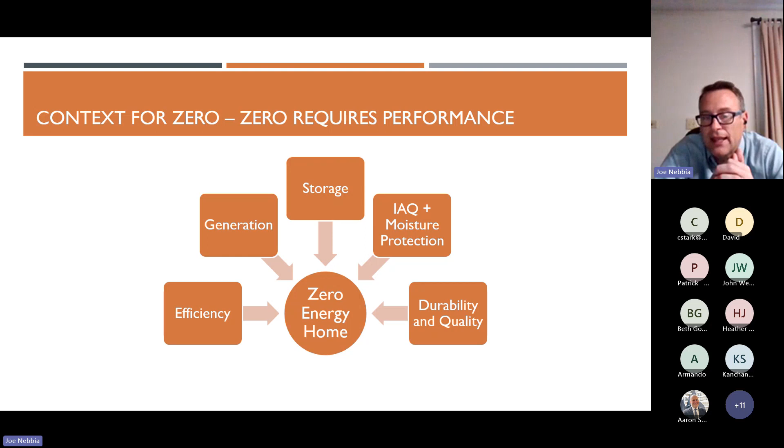So when I say a zero energy home, it includes all 5 of these components. And that's how I'll be addressing it in the class today.

So what makes up a zero energy home? What are the parts? First, we have to have an advanced envelope, and I'm going to go through these a little less detailed than I would in, say, a 2-hour class, but we have to have a fully insulated and air sealed envelope. We have to have advanced heating and cooling so that we're conditioning the space efficiently. We have to have advanced water heating so that we're delivering hot water in the most efficient and comfortable way possible. And then we have to have efficient components like lighting, appliances, controls, and those sorts of things.

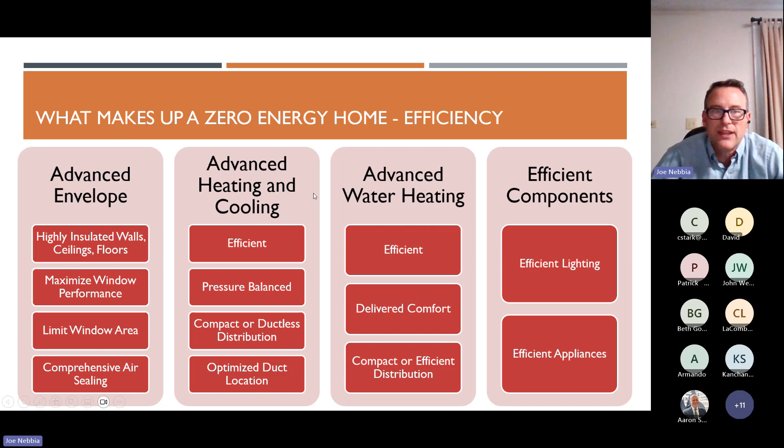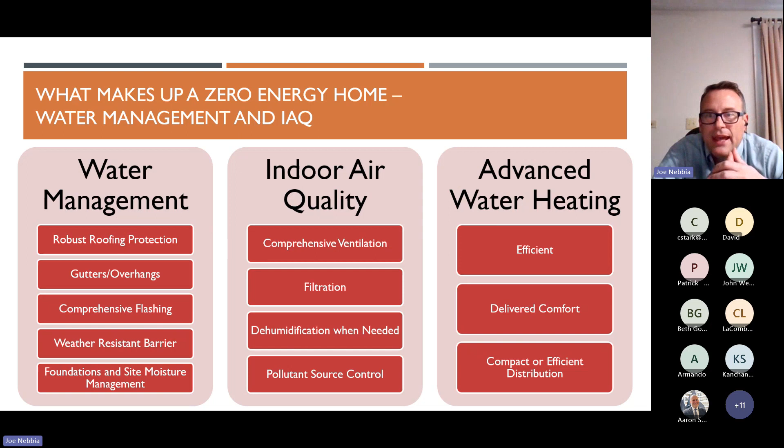For water management and indoor air quality, we have to manage both the bulk moisture and also make sure we're controlling vapor flow and things like that correctly. So we have to keep the water where it's supposed to be. We have to manage indoor air quality through comprehensive ventilation and filtration, possibly dehumidification and controlling pollutant sources. And then I've got an extra thing on water heating there, so we don't have to talk about that one.

For actually getting to zero, then we need to first start with the right sized home, right? So the bigger our house is going to be, we can still get it to zero. You know, there's a lot of discussion about, can a really big house be green? We can get that to zero, but it's going to take a lot more generation to get there. So we want to right size the home so that we know we can meet that zero energy target.

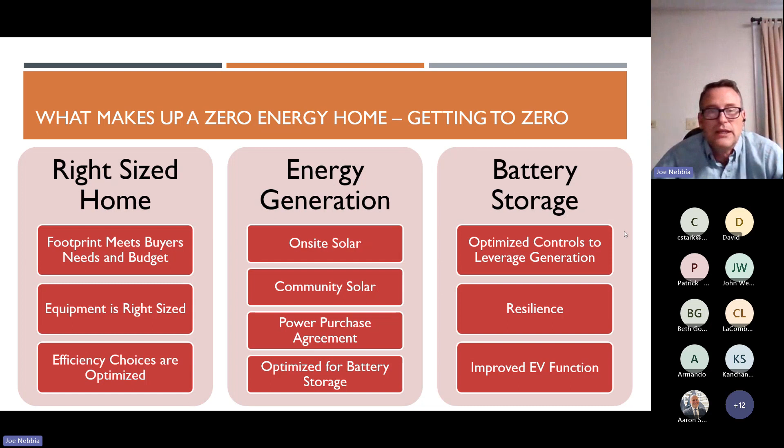We want to generate using a lot of the options I've already mentioned. And then we want battery storage, and that's going to give us not only ways to improve the efficiency of our generation system, but also grid resilience and possibly improved EV function. So those are the components I'm thinking of when I say zero energy home in detail.

Next, I'm going to talk about how do we define what's cost effective for zero. There are a lot of considerations for that. So first, cost is important, right? It's not the only thing, but it is a thing. And it's a lot of times when we talk about how to make zero energy cost effective, this is what we're thinking about, how to make the first cost effective.

I think many of us in this space also talk about things like operating costs and things like that. But I also want to talk, as we get into this, about concepts like first savings and cost versus value. There are things about first costs that change with the learning curve, and we need to consider that. How many of our first costs are one-time design costs that are going to change when we repeat the design? Then we talk about buyer operating costs. That's going to be important to the home buyer or the occupant. Builder operating costs, things like warranty issues and reduced callbacks, fewer days on market. These are things we have to consider in designing the zero.

These are some of the benefits. And then we need to think about other benefits outside of energy, things like savings from having healthy indoor air, health benefits, and the cost savings of having resilient, durable, quality design.

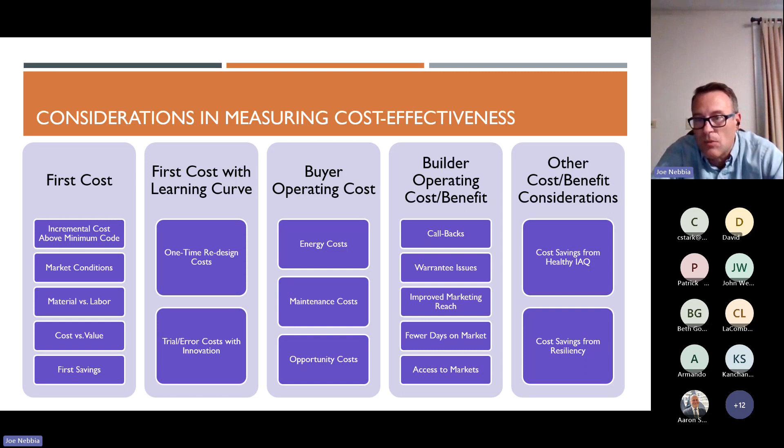So the first concept I want to address here is cost versus value. And I would say that we often in the building industry, we fail to give our customers a good experience with our product. And we only have one shot at it usually. We don't get a lot of repeat customers in the building industry. Depending on the builder model, maybe you do. But we fail to give that customer a good experience with our product. And a big part of that is we bring all of the cost, but none of the value. And so an example of that is insulation installation.

We can talk about how much getting to zero costs from an amount of insulation point of view. But in the picture here, in the top left of the screen, you'll see some significant compressed insulation. It's an R21 batt, a friction fit batt, installed in the cavity there, and you can see they didn't do a very good job installing it. They've actually put way too much insulation, didn't cut it to fit the height of that cavity, and they've just kind of stuffed it in there.

What I think this exemplifies is that it's not costing the builder less to do it this way. Not really - they're buying the same amount of insulation. So when you're designing a home and speccing out the envelope package, your buyer is paying for that amount of insulation. But in this case, they're getting maybe 50% of the value because it's not going to perform when it's compressed like that. Realizing that we need to deliver value when we're asking our home buyer to pay for something is an important part about making this cost effective, right? They're going to pay for something, they have to get the value out of it.

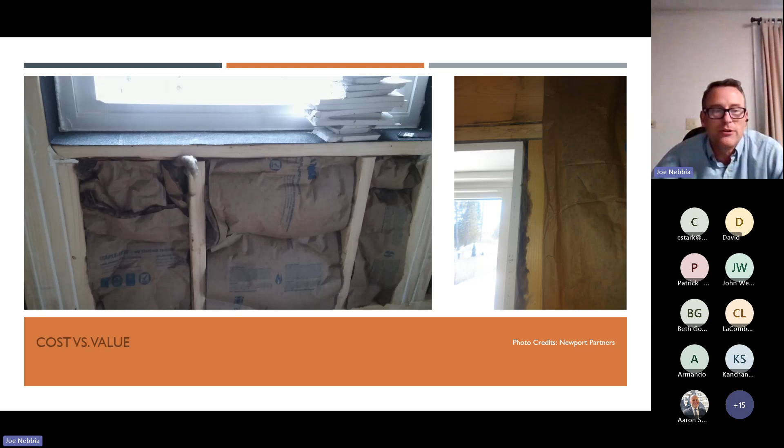Same thing, picture on the left here, we have a duct that we've got too much length of duct. I added a flex duct picture here because there was a time when we couldn't get flex duct - a year or so ago it was this rare commodity, and we would want to minimize our flex duct length as much as possible because the material was hard to get. Here we've got an extra 2 feet of bend there that didn't need to be there. It's actually providing a worse CFM in the install, and we've had to use more material.

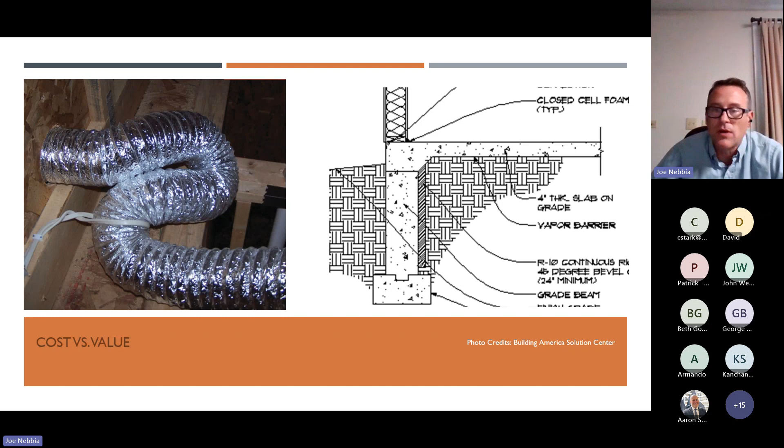And then finally on the right, you see a picture of slab edge insulation that's doing nothing, because it's not creating a thermal break at the slab edge. So somebody took the time to buy that material and install it, and it's providing the homeowner with no benefit. So again, if we're making the homeowner pay for something, we want to provide that value as it's coming in.

The next concept I want to discuss is products with multiple benefits. I think there's no one answer with any of this - you have to think about whether these products fit your type of building and your market, your supplier base, that sort of thing. But anytime I can, I'm looking for ways to get a product that's going to meet multiple goals for me. So again, this is conceptual.

This might not be the right product for you, but here's an example. Here's a ZIP product which has an insulating factor to it. It's also creating a thermal break as continuous insulation. It's structural in nature, so it's providing your structural sheathing, and with the tape, it's also providing your air barrier. So I'm getting one product, or one system really, that's providing my structural, my continuous insulation, and also my air barrier. I want to think about anytime I can pick a product that does multiple things for me like that.

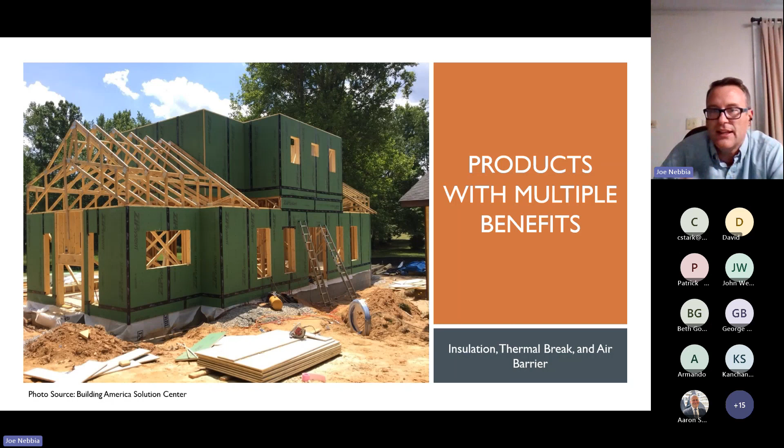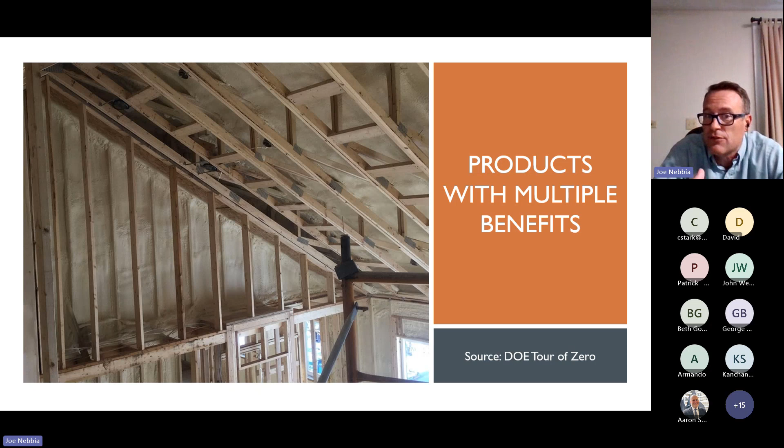Another example, this is a picture of closed cell spray foam, but spray foam again does multiple things. It insulates, it air seals, and in some applications it can provide structural benefit as well. So that's an example of a quality that other insulation products might not have. Not saying spray foam's the answer for everybody, but that's an example of a product with multiple benefits.

Here's an example of a balanced ventilation system with recovery. I'm not sure if it's an HRV or an ERV, I can't look that closely, but the point here isn't that this is necessarily the cheaper system. When designing things, we need to think about where we're pulling our exhaust air from and how we can offset some of that cost by doing multiple jobs. One common design is bath fan exhaust feeding into the HRV or ERV. You're pulling air from the bath because you need to do that anyway, so it becomes part of your HRV/ERV design. You're taking advantage of this more expensive system while eliminating other fans you might need. Think about those benefits where you can get them.

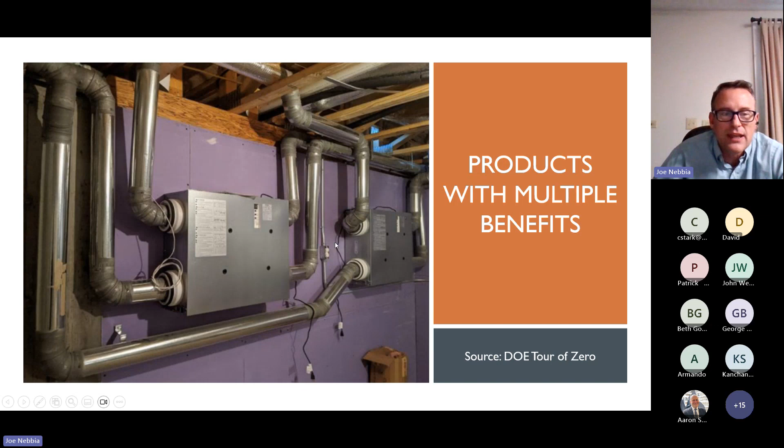Getting past the learning curve I mentioned early on - this is true about a lot of products where when we start to incorporate a change into how we're building something, there can be a big upfront cost. If we're moving ducts from the attic to conditioned space, there's a redesign cost, we've got to change our floor plan. If we're using heat pump water heaters for the first time, our utility closet might need to be redesigned from what we were using before. These are important costs to consider, but they're not ongoing costs - once we've got them designed into our systems, we don't pay that learning curve cost again.

One example is advanced framing. In that case, we're actually going to reduce the total framing cost going forward, but there is some learning curve cost for our trades, the carpenters, to understand how to implement that. So there's going to be upfront costs, but hopefully it's a saver over time.

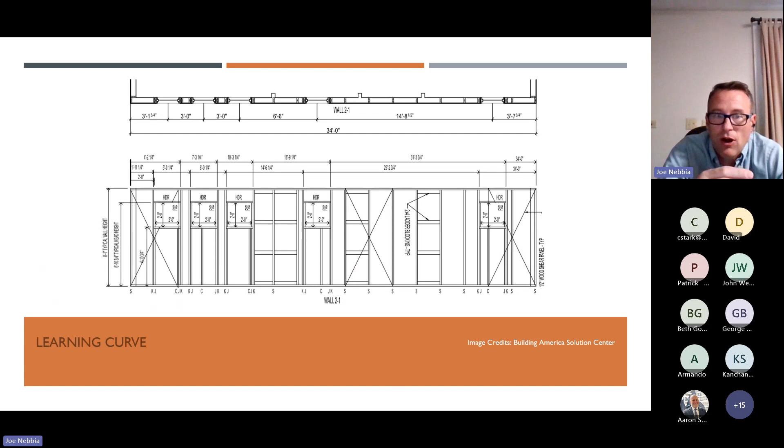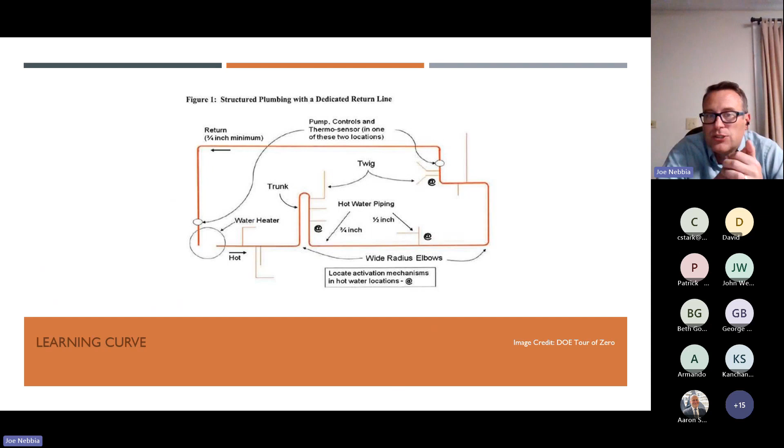Next we have an example of structured plumbing with a recirculation loop. If I'm trying to do recirculation for hot water comfort and water efficiency, there's going to be an initial plumbing redesign - this isn't how we would typically plumb a house if we're not using this recirc system. But once you've got past that learning curve, once your plumber has it standardized in their design for your homes, we can start to lower that cost of that technology a little bit.

Next, I'd like to talk about how we view costs in material versus installation. There's choices here - again, like the products with multiple benefits, there's no one approach that's going to work for you, but you have to think about whether you want to save money on materials or on installation. Those aren't always in conflict either, but different products are going to have different capabilities that you need to think about.

Here's an example of a double wall on the left. This builder, a good friend of mine, often said they knew how to build a 2x4 wall, so they just had their carpenters build two of them, and now they've got a double wall with a thermal break in between - a super insulated wall. They could have invested in a very innovative super insulating wall product. Instead, they built a very simple wall, built it twice, and filled it with blown-in insulation. So the actual construction is simple in that case, but the end result is very high performance.

So it's not always about picking the most innovative, advanced system. One thing I'll say is if you're in humid climates versus dry climates like this one, you need to be careful about your moisture design. On the right, it's hard to see in this picture, but it's a similar concept - a staggered stud wall. That's when they've got a 2x6 top and bottom plate with 2x4 studs staggered to the front and back of the bottom and top plate, so you've got a weaving continuous insulation situation, and they've added some additional zip system to the outside. But the point of this concept is you have to decide as a builder what's going to work best for you. It may be that a simple design done really well, or done with extra amounts of insulation, can perform as well as something more complex.

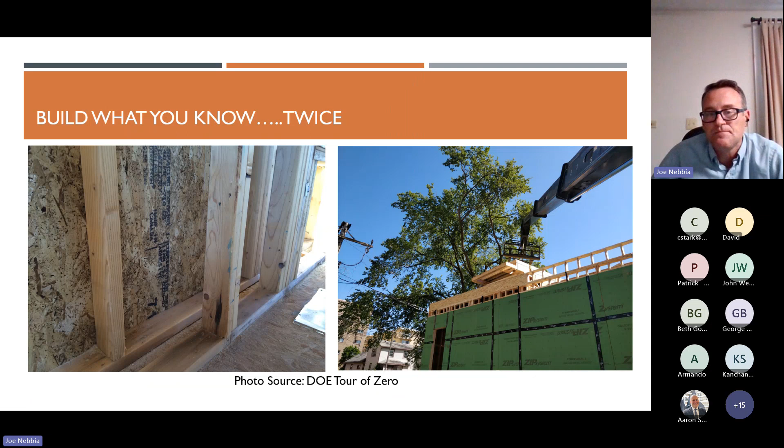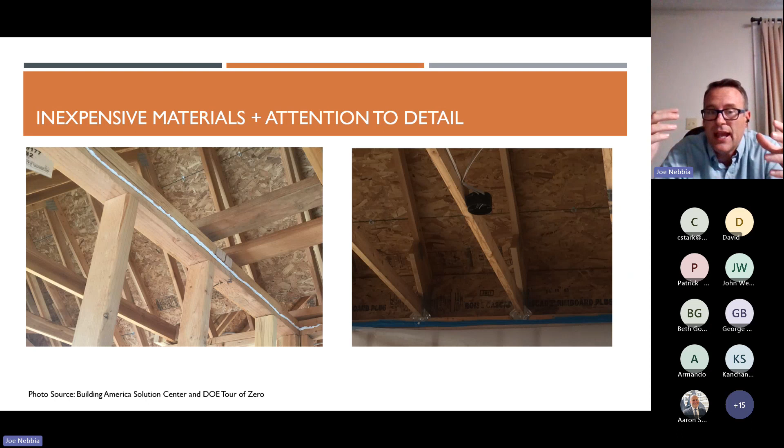Here's another example of that where we've got a builder using caulk and a liquid applied gasket. Very simple products, not expensive. They're low cost products that can be applied with attention to detail and achieve really good air sealing. In this case, they're buying cheap materials, but applying them in a way that focuses on high leakage areas and achieves really tight construction.

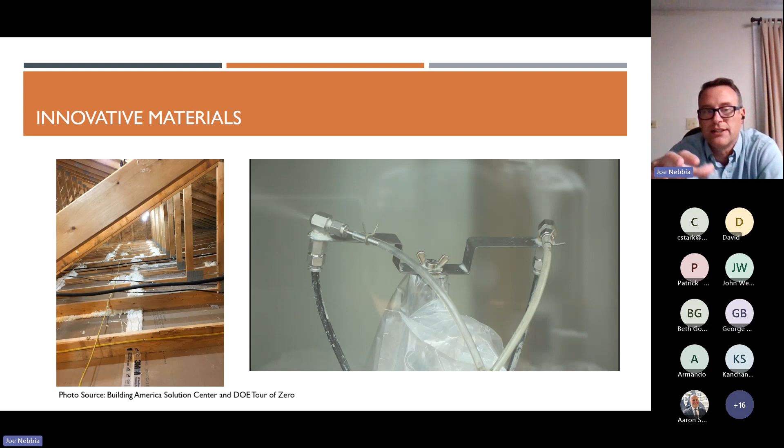An opposite approach might be to spray foam things instead of caulk. That's more expensive, but we might like the application better. Or, as shown here on the right, an aerosolized air sealant. That's a totally different process, really innovative, cutting edge, and it's all about the process. We invest more in the material and process, but maybe pay less attention to detail than with caulking exact joints, because this fills everything. There's also a repeatability of design that's important. If I can get the same blower door test result on every house because this product does that for me, there's cost effectiveness to that.

Now it's important to also consider what cost considerations matter to the buyer. When building or designing a zero energy home, we want to know about first costs - what can we afford to build and get value out of in the sale. But buyer costs are a completely different factor. First cost is still important because it means a higher home price and higher mortgage payments, but our operating costs may be lower, so we have a net monthly cash flow that's positive. First cost is only part of that equation for the buyer.

We know that with better quality, we'll have fewer repairs, lower maintenance costs, and fewer long-term durability issues. That's something many home buyers would be willing to invest in. I have a quote from Builder Online about common construction defects in just about everything we build: weather barriers, framing, mechanical systems, plumbing, fire-resistant assemblies, window and door installations. We have a high defect industry - not saying people on this call are necessarily in that camp, but that's an industry we work in. There are lower costs for our buyers if we can limit those defects. Again, one of the building blocks of a zero energy home is quality and durability, at least in my definition.

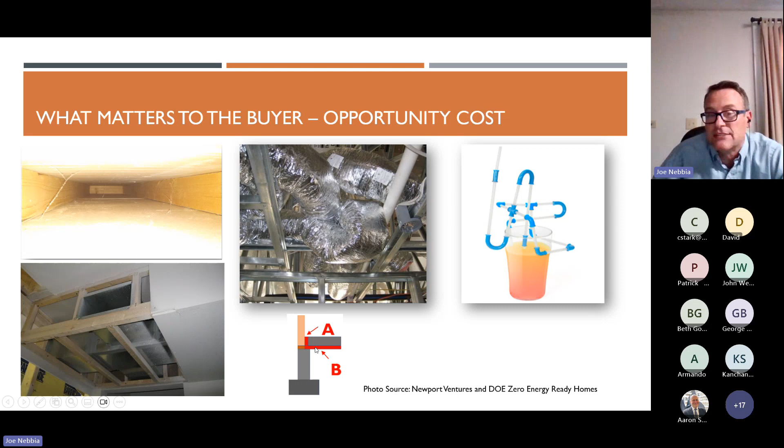And then I talked before about slab edge insulation. We're never replacing that slab edge insulation, at least in most installations. Getting that right the first time is absolutely crucial. Another concept I often think about with insulation is: is more insulation the best path? The answer is probably yes - we want more insulation, that's probably going to get us where we want.

However, there's a situation to consider that has a cost impact: the amount of windows we put in homes. This isn't my data, it's from the Journal of Light Construction, and it's a calculation.

It's pretty simple. If I have a U-value 0.30 window, that's code in climate zones 3 to 8 now for 2021 IECC, but I've got an R39 wall, a pretty big double wall. With just 15% window-to-wall area, my R39 wall is really an R15 wall from a whole assembly point of view. If I have an R60 wall, which is insane, it's only R17 with a 0.30 window.

And even if I get really low U-values on my windows, 0.15 is an insanely good triple pane window, at that R39 double wall I've still only achieved an R23 at 15% window-to-wall area. What's the message here?

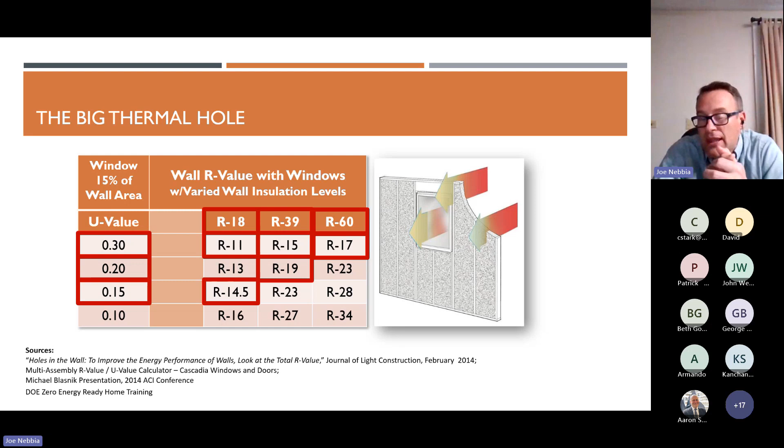Fewer windows. Nothing against windows, we need them, they're great, they let light in, we can open some to let air in—not mechanical ventilation, but it allows that—and they give us egress. There's purposes to windows, I'm not saying get rid of them, but we could do with fewer. They're more expensive than just a blank wall with insulation in it. We can get to zero much more cost effectively with fewer windows. Eliminate windows, we lower our envelope costs, and make that wall perform that much better in reality.

Now I'd like to talk a little about resilience, which might be disaster resilience. It could also be thermal resilience in keeping our heat in when the power's off, or grid resilience so we can keep powering things when the power goes out, or even just optimizing our generation system so that when the sun's down we're using the battery instead of the solar system, and we can make our zero energy performance even better.

So again, thermal resilience—if we can have a home that only drifts 1 or 2 degrees after a few days of no power in upstate New York or Minnesota or North Dakota, that's a pretty amazing thing. Power resilience—if the power goes out and I can still keep operating my house, that's pretty amazing.

And then finally, disaster resistance. If we're going to build a zero energy ready home, I don't want it to blow away, I don't want it to blow down, I don't want it to fall down during an earthquake. Wildfire—I'm not sure we've really come up with the best way to prevent homes from burning down in wildfires. We have some strategies, but if a wildfire hits your house, there's not a ton you can do.

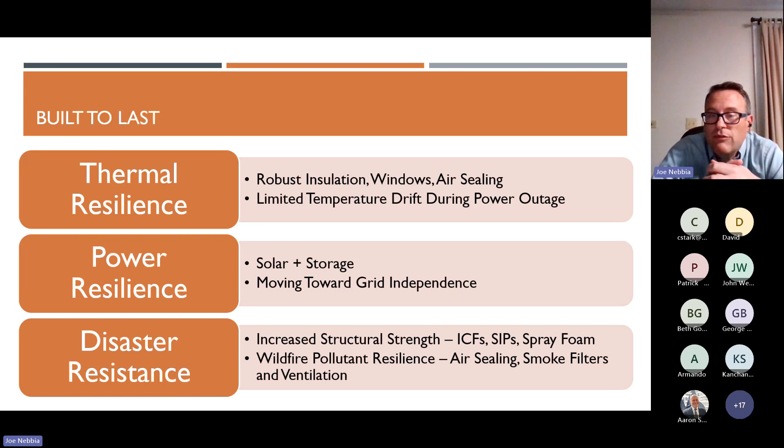For wildfire pollution resilience, if there's a wildfire in the area, we want high capture filtration and things like that so people can still breathe and stay in their home. That zero energy home is going to be that much better and cost effective if we don't have to replace or repair it significantly after a disaster. Think about how much smoke damage costs in a home. If we can keep that smoke out during a wildfire event through filtration and ventilation controls, we've saved that customer a whole lot of money.

Along the lines of resilience, accessibility, and adaptability—a home that we stay in will be more cost effective than one we sell and move from repeatedly. So if we can design adaptability, universal design into our homes, that zero energy home is going to be able to pay for itself because we'll be able to stay in it longer.

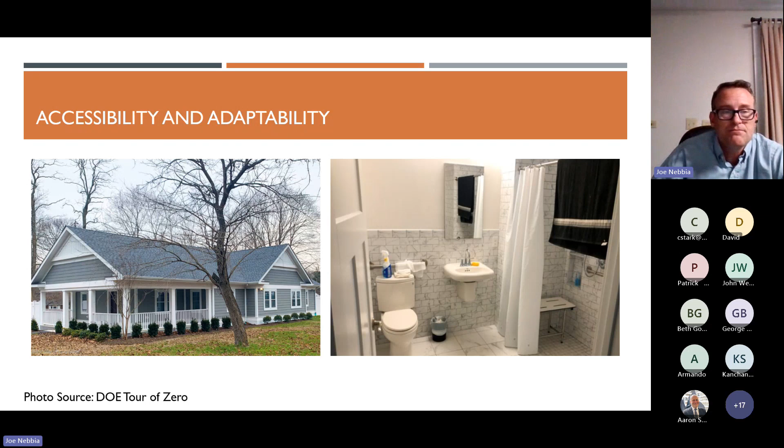Now that I've talked about those concepts, I want to talk about specific case studies where people are implementing a lot of these strategies around the country. Most of these case studies are from award-winning builders, on the Department of Energy's Tour of Zero, and you can look at them in more detail there, but I want to highlight some of them. We've got about 30 minutes left in the class.

Joe, why is there no driveway on that house? Yeah, I think it's over on the left there. Not all homes have a driveway. There's a garage door right in front. That's funny, I've never noticed that about that picture. Just a reminder, put your questions in the Q&A, we'll keep asking Joe. I see something came up in the chat—I think it's just a thumbs up for the case studies.

I'd love to see an off-road EV that would work well with this garage. I guess you would need it in that case. I think the plants in front of the garage are a nice touch too. Absolutely. All right, no questions thus far.

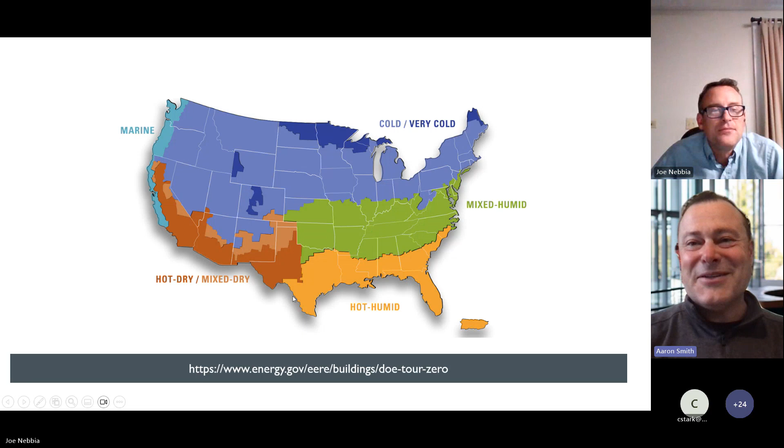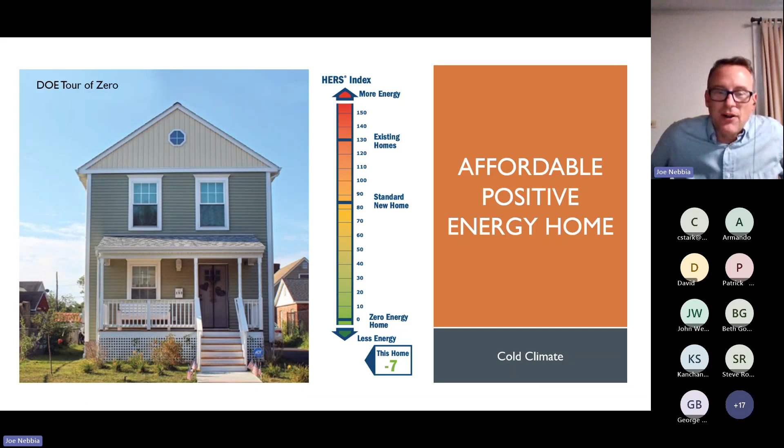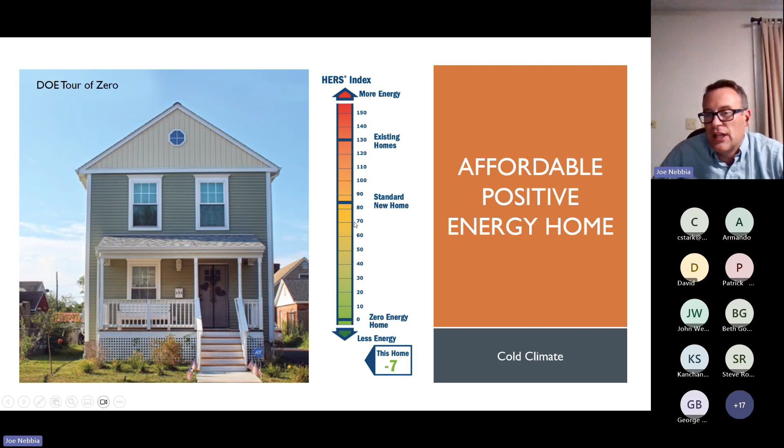Thanks. Okay, so the first home I want to talk about is a Habitat home in Connecticut. Obviously, part of Habitat's mission is making things affordable. I'm not saying everything about cost-effective design has to be about a specific affordable housing program. Cost-effective can be in different ranges for different buyers. But this is an example of an affordable home that reached HERS -7, which is pretty impressive.

They used open cell spray foam in the cavity as well as continuous sheathing and advanced framing to get to an R31, R60 attic with blown-in insulation, R21 basement with a precast basement system, triple pane windows, and a very tight 1.12 ACH50 using their spray foaming and zip wall as their air sealing strategy. For mechanicals, they used ductless mini splits and transfer fans to move that heated and cooled air throughout the house. They had a heat pump water heater as well as an energy recovery ventilator.

LED lighting isn't really innovative at this point, right? Everybody should have it, but it's certainly cost-effective from an operational standpoint. For generation, they had 7.7 kilowatts of solar, again to get to that -7. For quality, they had planning meetings with all of their subs to make sure everyone was on the same page with what they were trying to do. Comprehensive water management for durability so that the walls wouldn't get wet and deteriorate. In addition to that balanced ventilation system, they also added advanced filtration and controlled their sources of pollutants in the house. So pretty good package for what ended up being an affordable home.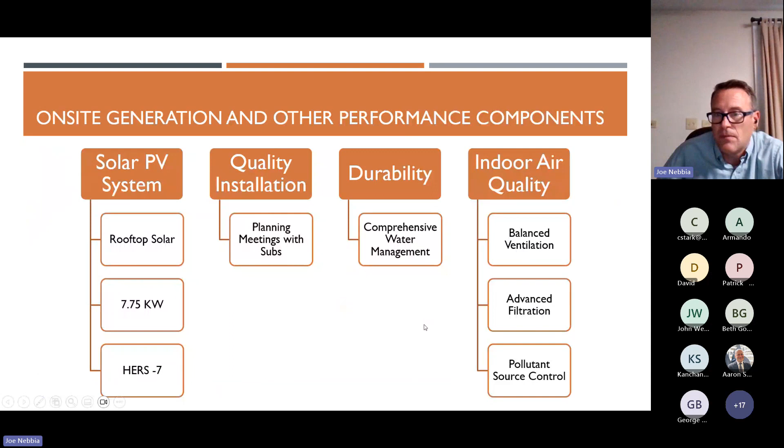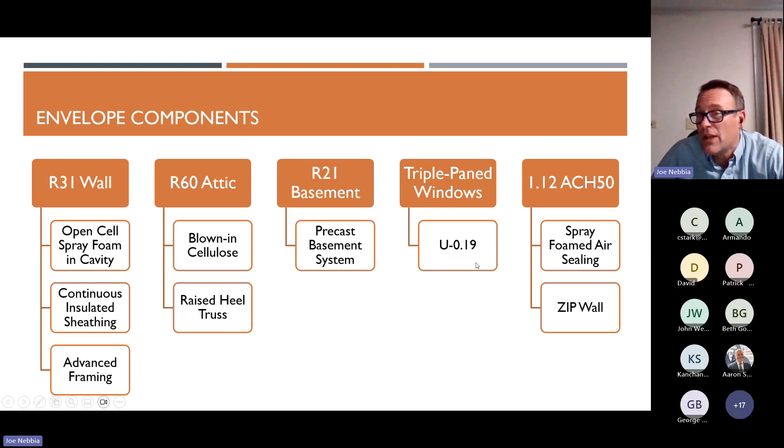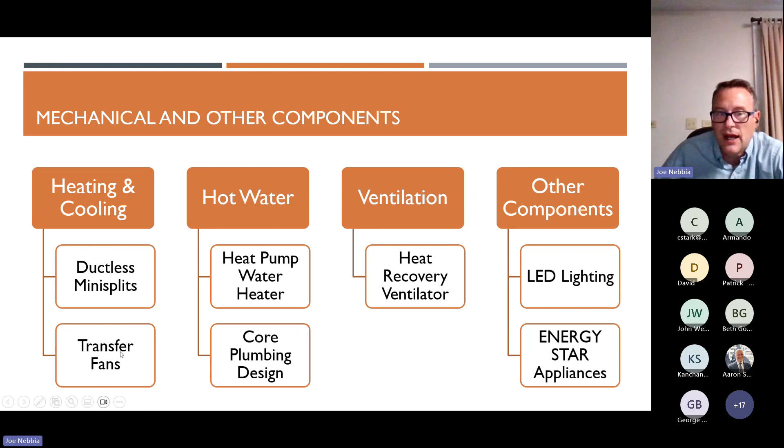If you look at this, there's nothing particularly incredible here, right? Open cell spray foam widely available with zip sheathing on the outside, blown-in cellulose in the attic. Nothing fancy there. Triple pane windows is probably one of their big investments. Ductless mini splits is more on the innovative side, but they've made it cost effective by having fewer heads and using transfer fans to circulate the air.

The next example I want to show you is this above-garage ADU. This is out in Washington, I believe, where they've got a detached garage on the property, and so they built this ADU to help the homeowners with rental income. They were also able to use the ADU's roof area for solar that helps power both the accessory dwelling unit and the house itself. So good use of space in this situation.

Again, nothing fancy on the walls, blown-in fiberglass as well as continuous insulation to get to a total of an R31 wall. They are using an unvented attic with above deck insulation. That's not really common in residential construction, so that's a little bit out there, as well as blown-in at the ridge line of the roof. Floor insulation, because it's an ADU over a garage, they had to insulate that floor. They have R48 blown in.

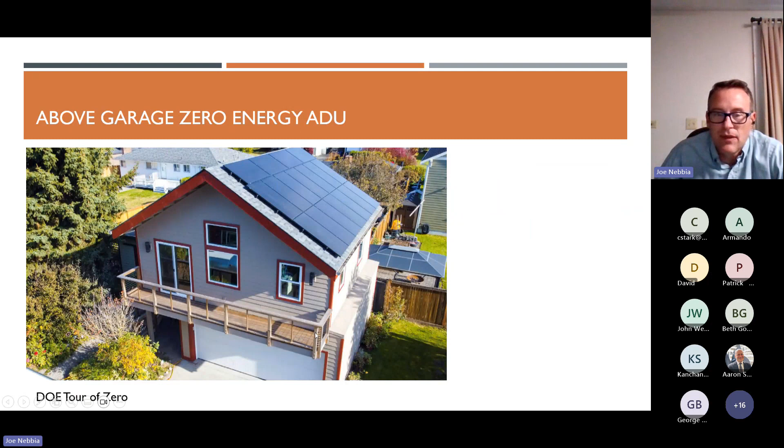Again, it's a lot of insulation, but it's not a particularly innovative type of insulation. So you can see how some of these builders are trading off amount of insulation for maybe some of the cheaper kinds of insulation. Triple pane windows, again, that's a big investment here. And then AeroBarrier got this down to a 0.94 ACH50. That's really impressive given the fact that this is above the garage, so there's an external floor here, which has to have extra attention to detail. It's also a small volume, which is harder to hit that 0.94 ACH50 on.

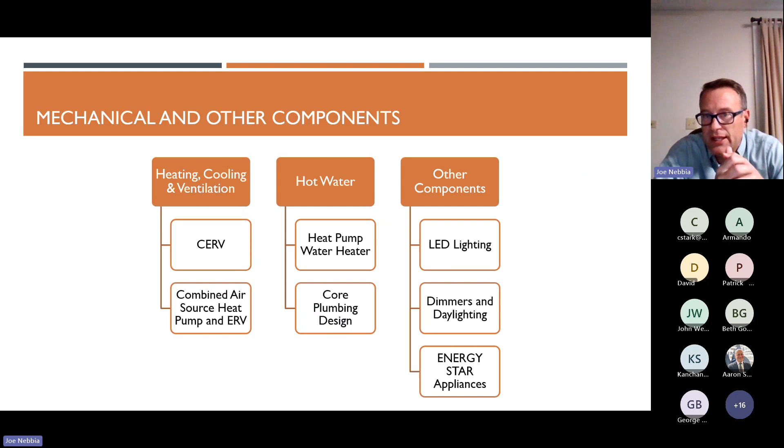For conditioning, one of the ways they saved money was they combined their ventilation system with their heating and cooling. So they used a conditioning ERV, kind of a niche product, but for a small space like this it works really well—one of those products that does multiple things: heating, cooling, and ventilation. Heat pump water heater, and they also used lighting controls along with their LED lighting. The rooftop solar was 5.85 kilowatts, probably more than just the ADU alone needed. The ADU was actually a HERS negative 20, but again they were able to use some of that excess production to help power the main house.

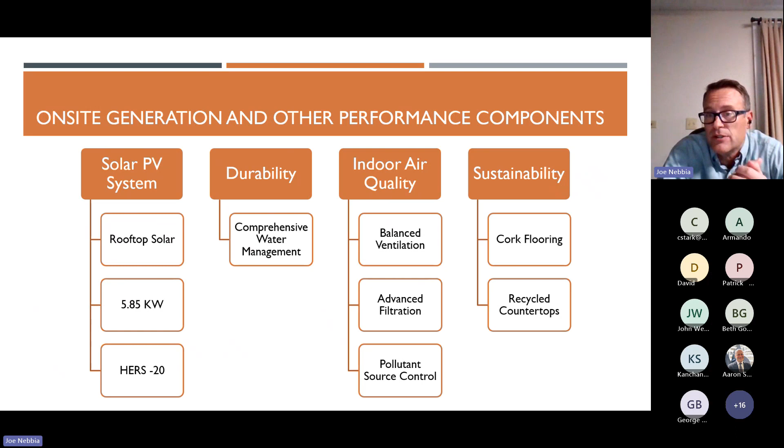Comprehensive water management for durability, indoor air quality with that CERV, as well as advanced filtration and pollutant source control. They had an interesting thing with cork flooring and recycled countertops, because one of their goals was that a zero energy home has to have sustainable materials. So for this builder, part of defining cost effective was including sustainable materials, and that was something where they had to think about their product selection.

The next project I want to talk about was really an impressive project in my mind. It's a mixed-use multifamily building where the first floor is retail, and then I think it's maybe 39 or 40 units. It might be 60, I'm forgetting the exact number of apartments.

It's net zero performance on a whole building basis. You can see all of the solar there on the roof, but there's some really incredible things about this design. One is that, first of all, it's ICF construction for multifamily, which I think is a great application. It also has a ground source heat pump system that serves for both the heating, cooling, and also the hot water.

What's amazing about this is that when the designer was asking the ground source heat pump contractor for a quote, the contractor said, 'Do you want hot water with it or not? It doesn't cost any more.' And that's really incredible, that they can get their heating, cooling, and hot water for the same price as their heating and cooling.

The reason for that is, for the ground source heat pump, you want to be grabbing waste heat in cooling mode whenever you can. This apartment building, despite being in upstate New York, is actually cooling dominated because it's so super insulated. There's hardly any heating load. Most of the load in the units is actually from internal gains.

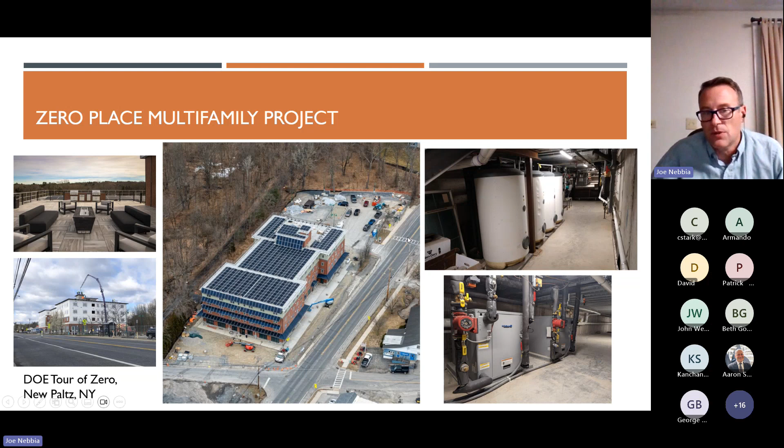ICF walls is pretty innovative. This builder has argued to me that when you want to get to zero energy, cost effectiveness around ICF starts to look a lot better, because it's harder to get super insulated and lower HERS scores with traditional products. It allows them to do it with, or you need much more attention to detail with traditional products than they're able to use with the ICF, which is very easy to install and to air seal.

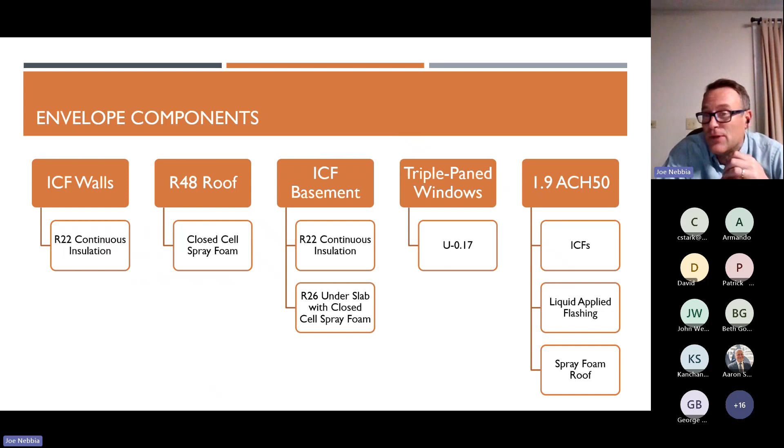For the roof, they use closed cell spray foam, ICF basement, as well as under slab insulation, and then triple pane windows. Of course, that's another advanced product, but they're finding a way to make it work in a multifamily building. 1.9 ACH50 for this builder, that's actually pretty high. Their single family homes are down closer to almost no leakage in real measured amounts, but multifamily is a little harder to seal. Again, that ground source heat pump is what I think is really innovative about this project.

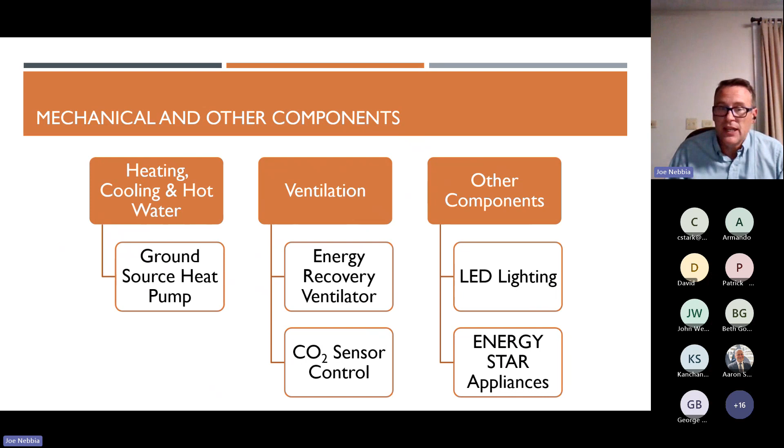They're also using energy recovery ventilators for all of their in-dwelling unit ventilation, and CO2 sensor controls for boost ventilation. The solar, they had 248 kilowatts of solar, and got to a negative 14. I guess that must be a per unit number for the HERS index itself.

For quality installation, they had an integrated design process where they worked hand in hand with their energy consultant, met with subs, and I've heard the project managers on this say they really had to bring the GC along to understand this different kind of construction and have a lot of input in that kind of quality installation process. Durability, they have high wind resistance in this project, and then they have advanced filtration and pollutant source control in addition to that sensor-controlled balanced ventilation.

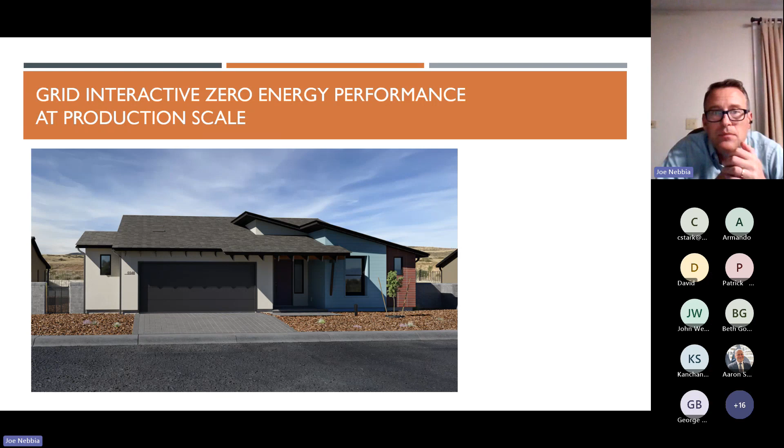This is an interesting project I want to highlight real quickly. It's in Arizona, and it's grid interactive zero energy performance at a production scale. What I think is interesting about this, again, there's not anything super out there as far as how they're building.

Open cell spray foam, very common in the Southwest, along with some rigid foam insulation on the outside, open cell spray foam in the attic, and they're using double pane windows, but they're getting to a 0.66 ACH50 on a production scale, which is pretty amazing. Again, using this aerosolized air sealing product, this particular builder learned how to do it themselves, and so that's how they made it cost effective.

So they had their staff trained to install the Aerobarrier system, and they do it on all their homes. That's how they can save a little bit of money.

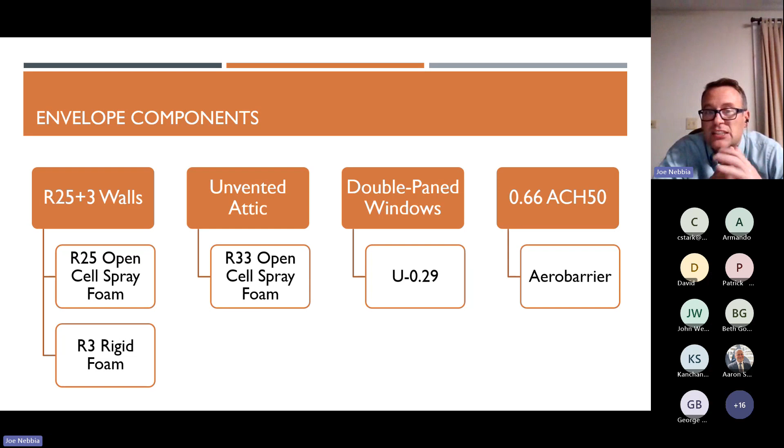But I can't stress enough, at a production level, the predictability of air sealing results has a cost factor to it. If I can say that every time I'm going to meet my air sealing target, I'm not going to have to go back out on site. Every time costs money to re-air seal things, find the leak, do infrared testing to find where my leakage problem is on something that fails. This is really key to a builder doing volume, especially if it fits their building type.

Mechanicals, again, nothing super fancy here. They've got a central air source heat pump, an efficient one, but it's just a standard split system heat pump. Energy recovery ventilator with IAQ sensor controls. We're seeing a lot more of this now. Builders are thinking about ways that they can optimize their ventilation system size by controlling it based on actual pollutant load in the space. And then LED lighting and lighting controls.

So Joe, that IAQ sensor would just be like a humidity sensor, a CO2 sensor, some of those things. In this case, it's a CO2 sensor. Other people are using PM sensors. The main thing we're actually concerned about in indoor environments, as far as long-term effects on human health, is particulate matter generated in cooking, and then NO2 generated in cooking. Those are kind of the acute things, and formaldehyde's a little bit expensive to do sensor work on. CO2 is kind of a proxy, right? We know that people are breathing in the space, and so we want to ventilate it at those times as opposed to times when nobody's there. But yes, you could do humidity sensors as well. There's a lot of different ways. This particular one, I think, was CO2.

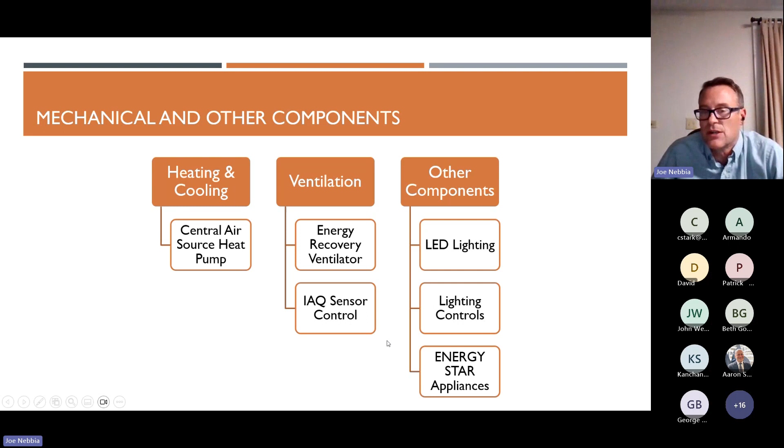Great, thank you. The other really interesting thing about this project, and this builder in general, is that they've done a lot of work optimizing their solar system combined with battery storage. So you see they've only got 3.74 kilowatts, and they're reaching a HERS 14, and they would say they're actually reaching zero energy performance, and it's not quite captured in the HERS rating system yet.

But how they're doing that is they've done studies, and they're using controls to optimize when the solar is being used and when the battery is being used. And they're analyzing local time of use rates, which they have for residential construction, and actually advising their customers on which utility plans to use based on their algorithm for optimization use. So they're able to get to actual zero energy performance regardless of the HERS index, with a smaller solar system by optimizing that battery system and the controls around it.

So Joe, they're in a market where there's a peak off-peak rate that they're really trying to plug into and optimize. That's right. And so in an area where you don't have that, in an area where you don't have residential time of use rates, or you don't have net metering, this is a little bit more complicated. But if this fits your situation, they're able to buy a much smaller solar system and pair it with the battery than they would have to. I think they said this would need to be like a 7 kW system if they wanted to get to actual zero performance. Otherwise, and you still wouldn't get quite to zero performance because of the peak and non-peak aspects of it.

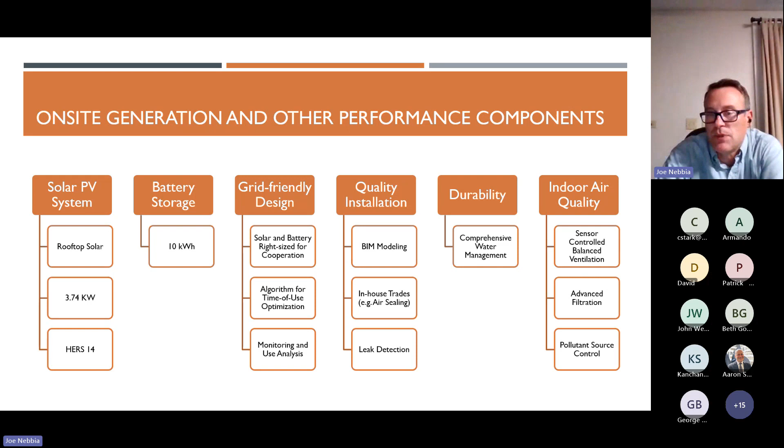This example I just want to highlight briefly, since we have about 13 minutes left, because it's a SIPS home. One thing I want to stress about this product is that it's one of those products that does multiple things. This product is my whole wall - it's everything structural, my insulation, my sheathing, my air sealing, all in one package. I love products that do multiple things.

The other thing about this is the flexibility. With a SIP panel, I can put a window anywhere because of the way the system works. If I need to change my design midstream, I've got some flexibility to do that - not unlimited, but there's some amount of flexibility as I'm installing these panels to change egress points or things like that. So I like that about SIPs.

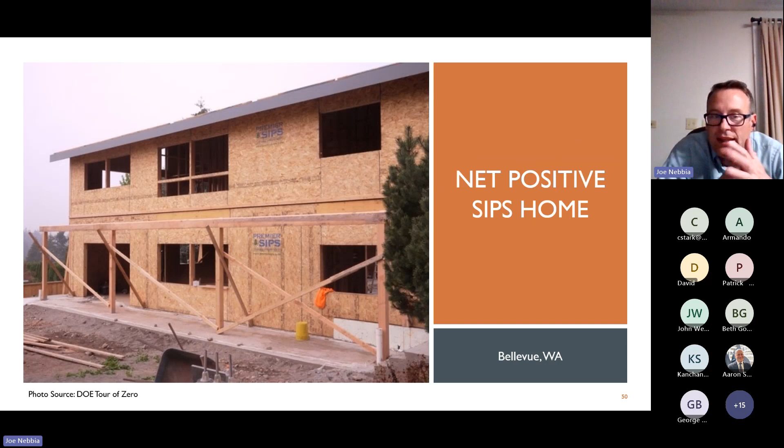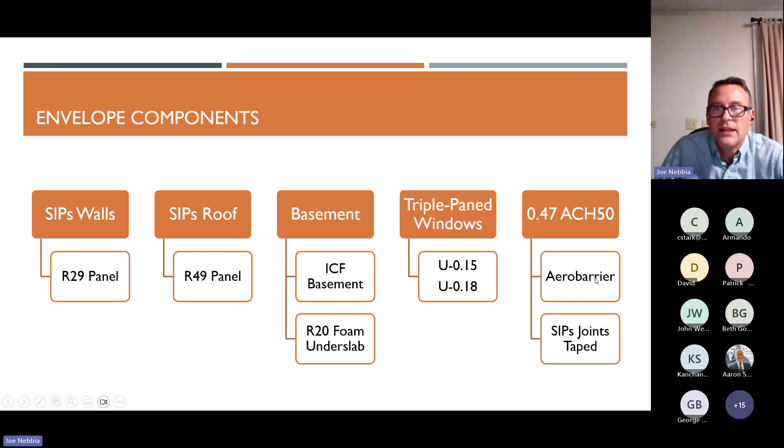This particular house used an R29 panel and an R49 panel on the roof, with an ICF basement - I don't actually see a basement in there, so I'm not sure if that's a misprint, but maybe part of it is. They used a 0.15 or 0.18 triple pane window, pretty advanced, and added Aerobarrier in addition to the SIPs. Look how tight they're getting - 0.47 ACH 50. I'm not sure they needed both SIPs with taped joints and Aerobarrier, but they wanted super tight performance and they got there.

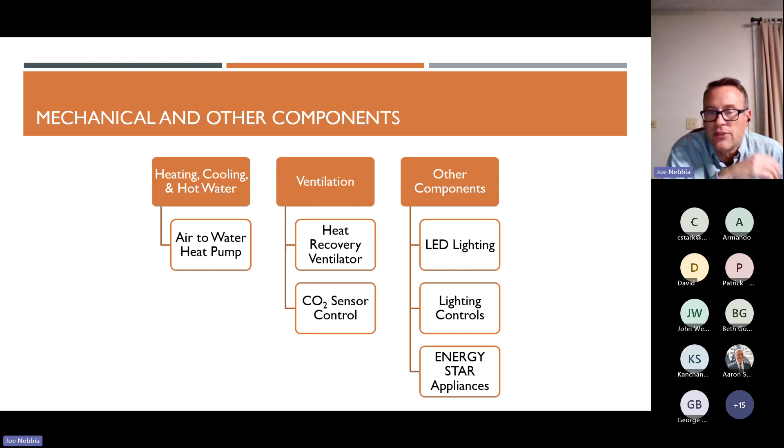An air-to-water heat pump, again one of these products doing multiple things because it handles heating, cooling, and water heating. Unlike the ground source system we showed before, this is an air source heat pump used to heat, cool, and water heat the space. Finally, a heat recovery ventilator with CO2 sensor controls, and this builder is also trying out particulate matter sensors.

Rooftop solar - they're using 12.87 kW and overproducing by 22%, using that to charge their electric vehicles. One way to do electric vehicles cost effectively is to have solar, and it helps to have a battery too. This one is only battery ready, but Joe, I think that's important.

Joe, have you seen any of the Tour of Zero or Housing Innovation Award applications doing vehicle to grid or integrated charging yet, or is that coming online? I've seen people talk about it.

I'm not an expert on this, so if somebody's from a vehicle-to-grid company that makes a product, I'm not trying to say anything specific about your product, but the reviews I've heard so far are that there's some software work still to be done - from people who have bought bi-directional chargers. I think that's incredible potential, and I'm sure some people have found ways to work it, but I've also heard a lot of hiccups. It's one of those things just getting out into the marketplace, and I'm sure it'll continue to improve.

It'll be interesting to see, because the application period for next year's awards is coming up, and if that's a big shift we see in new technology coming online... Yeah, I'm always interested in seeing those. I'm not seeing a ton of them yet, at least in the Housing Innovation Awards and Tour of Zero, but I am seeing some builders talk about the concept - just not quite putting it in yet.

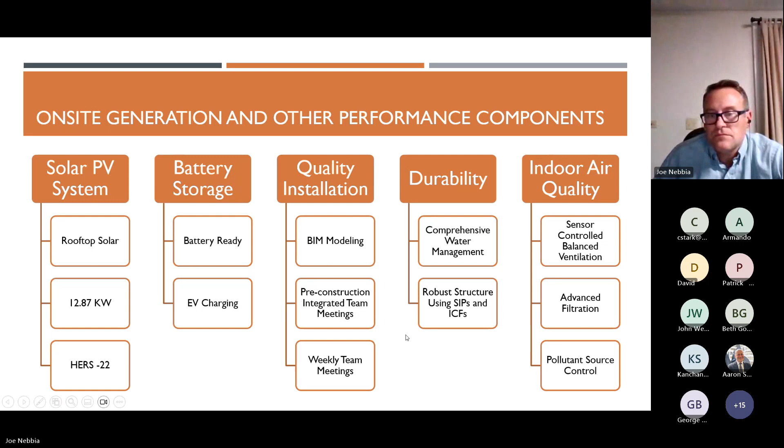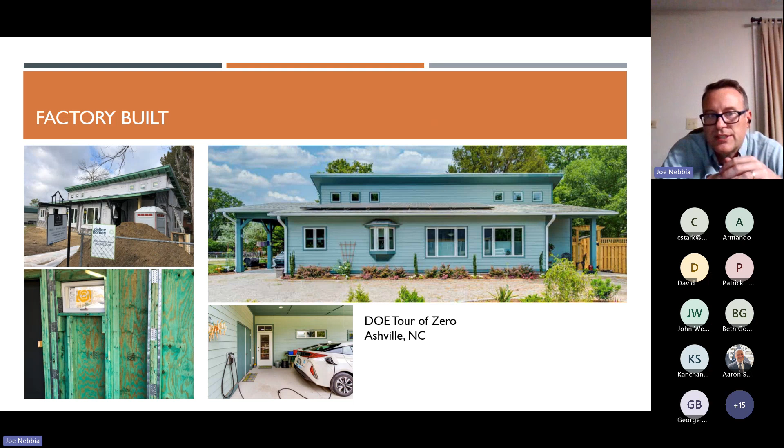I have about 9 minutes left, so I'll talk about a couple final projects here. This one is in Asheville, North Carolina - I don't think they describe themselves as modular, it's factory built. They're a panelizer, but they have kind of set designs for their houses, achieving cost effectiveness through this factory environment.

Nothing earth shattering as far as the wall goes - blown in cellulose and rigid insulation, along with open cell spray foam at the roof deck. Slab edge insulation, that's pretty typical. Double pane windows, and for air sealing they're using strategic use of spray foam as well as gaskets. Nothing real earth shattering there either.

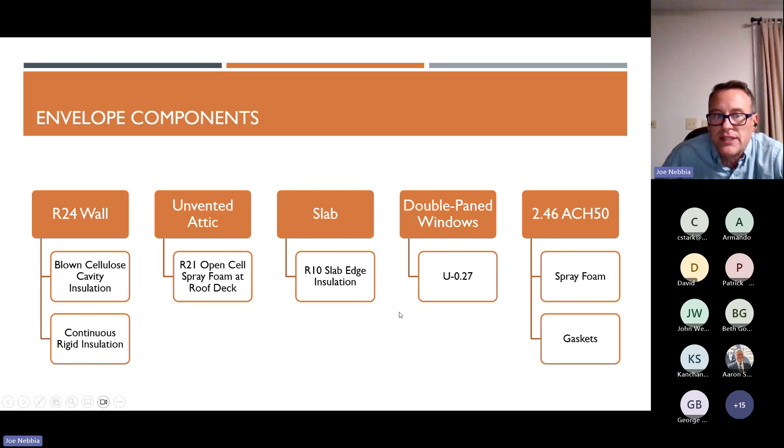But they're getting to that zero energy performance through careful attention to detail. A ducted heat pump, again kind of a central split system, along with maximizing passive solar design, a heat pump water heater, and a supply-side ventilating dehumidifier, which they found worked better in their climate than a balanced system. There are some builders who feel that way in the Southeast.

And then for solar, they've got 7.2 kilowatts on the roof, negative 21 ERI. Again, this is an example I think of a right-sized home. They've sized the home so that they can overproduce and have the potential to charge an EV system.

So they focused on getting the system pretty efficient, efficient mechanicals, oversizing that solar a little bit, and hopefully that'll be a long-term cost effectiveness for the home buyer. The factory controlled environment adds some cost savings for this builder, and they have very high termite, hurricane, and wind resistance built into all of their structures. So this builder focuses on delivering long-term durability so the buyer can realize those cost investments they make up front.

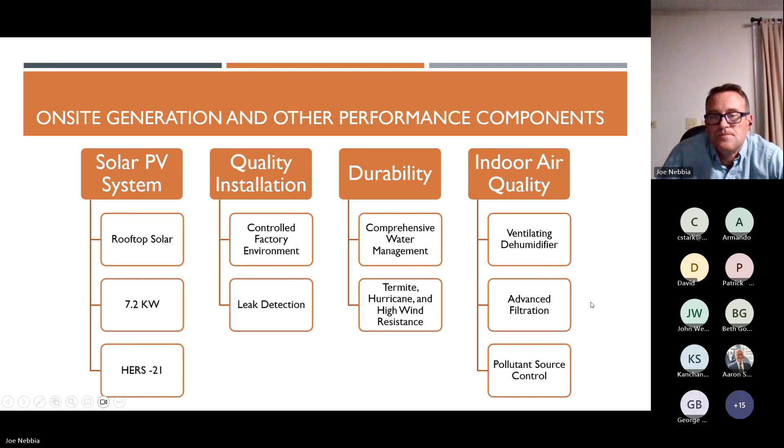Now I'll show this home from a builder in Virginia who likes to use the term simplicity of the build. One of their big focuses is not doing things too complicated, trying to keep things as simple as possible, because they know they can replicate it and achieve it with a high amount of quality.

So the type of systems they're using: flash and batt cavity insulation with continuous rigid insulation. Again, nothing too out there as far as their walls, blown-in cellulose in the attic. This builder, by the way, is upgrading as they move to the Zero Energy Ready Home version 2, all of these insulation things to meet the new specification.

But at the time this home was built, this was what they needed to do. Rigid foam insulation in the basement or crawl space, depending on what they're using in that development, and a double pane window, pretty standard stuff that anybody can get on the market. They're getting to a 1.4 ACH 50 essentially through attention to detail.

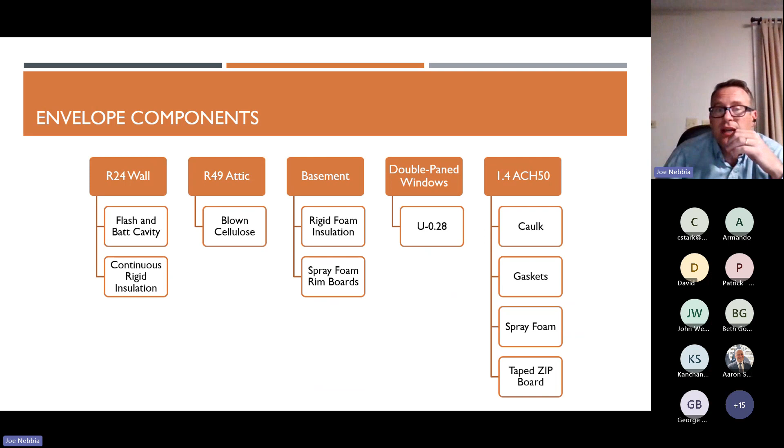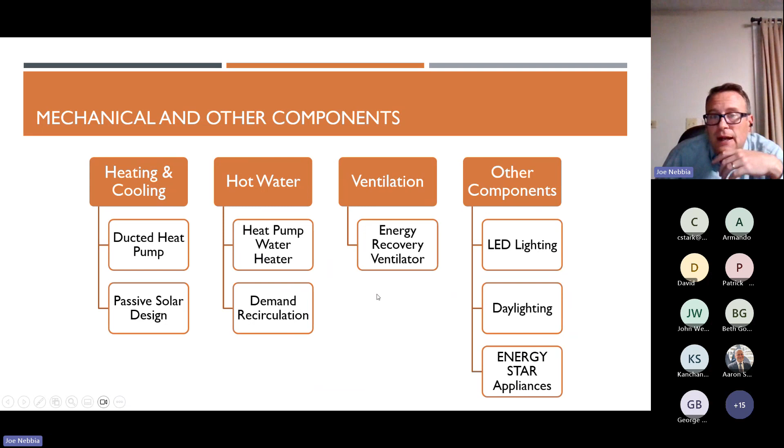Their products help them some, open cell in the wall helps them some, tape on the zip board helps them some, but mostly it's attention to detail, and I think that's an important aspect of this design. A ducted heat pump, again just a regular split system heat pump, along with a heat pump water heater, energy recovery ventilator, and LED lighting.

They've got 6.2 kilowatts on the roof and are getting to a HERS 4 on this particular home. They have EV charging and battery options, so the homeowners can get that.

But one area where this builder really stands out is in BIM modeling. In their design meetings, they're identifying every screw, every inch of siding that they're going to need to order, every stud, every floorboard. They have it counted exactly. So they don't have waste, or at least very limited waste in the home, because their BIM modeling is so sophisticated that they can predict what they're going to need and not have to over-order.

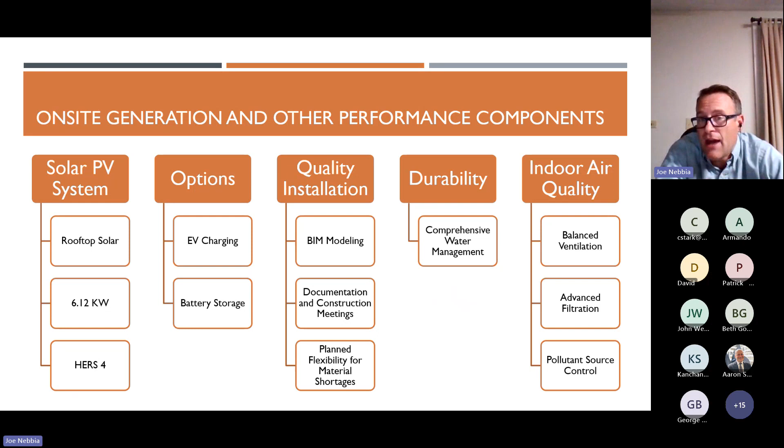There's a huge cost savings in that. The other thing I want to mention about this builder is that as they thought about community solar, it may not be the most cost-effective solution to put rooftop solar on every house. In fact, as a society, having each of our homes be mini power plants might not be the most cost-effective way to get to a societal zero energy. It certainly has its place, and I love rooftop solar, but it might not always be the right fit.

So one thing they're planning in one of their next communities is community solar. And the thing I want to stress here is that utility rules can make a big difference on whether this is cost effective or not. For example, one of the roadblocks they ran up against was the utility wanted to, for any community solar system, not rooftop solar but community solar, charge a $75 minimum bill.

And the problem with making it a minimum bill is that you've now disincentivized the builder from going from a HERS 40 to a HERS 0. Because if I add all that cost to get to zero, that HERS 40 home might have a $150 a month bill as it is. So if I go all the way to zero, I'm now only getting $75 of that $150. So I've wasted half of that investment there.

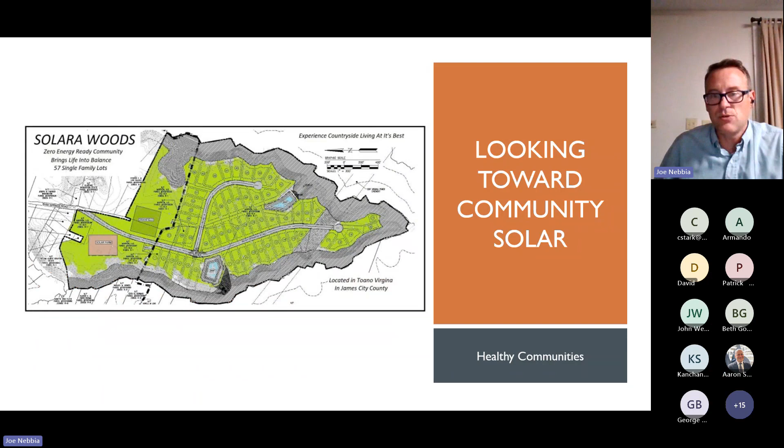I thought it was interesting on the multifamily project. They interconnected 248 kilowatts of solar, but I think, at least where I live in Minnesota, we're limited to a 40 kilowatt interconnect per address. Yeah, absolutely. So it's all over the board out there.

But I love what you're talking about in energy rating software, because this is really what makes it all come together. I think we saw in your examples a lot of different approaches: this type of wall, this type of roof, this type of basement, this type of air sealing. This is where it comes together in the energy rating software. So if you could touch on that briefly, that'd be great.

Yeah, and this is just a highlight. I can't teach anybody how to use all of these in this time frame, but there's a lot of tools out there, and they all have different benefits to them. Something like NREL Open Studio ERI is meant to be kind of this open source engine. WUFI has a lot of moisture modeling that goes into it. BEopt has optimization of, you can optimize dollar per HERS score kind of things. There's all these energy rating things that are really helpful.

One thing, if you're a builder and you're working with an energy rater, some energy raters out there are the best people I know in the business, and they will help you get to the best, most cost-effective solution for zero. Sometimes you're going to be working with a rater who says, here's how I've done it in the past, that's how you get to zero. There's no one way. And so if you're not getting an answer in the energy model that is cost effective for you, you're going to need to redesign, and you may need to pull the rater along with that.